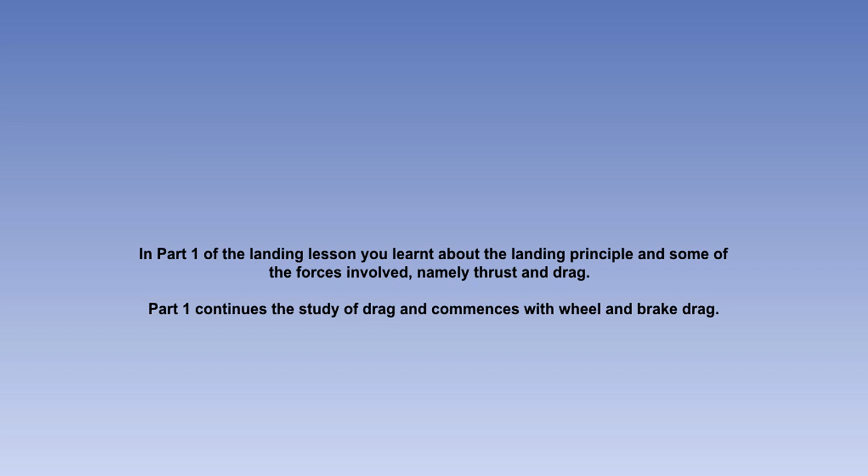Having discussed aerodynamic drag, let's now consider wheel drag and brake drag. Wheel drag is the friction force between the wheel and the runway and with the wheel bearings, whereas brake drag is the friction force between the brake discs and the brake pads.

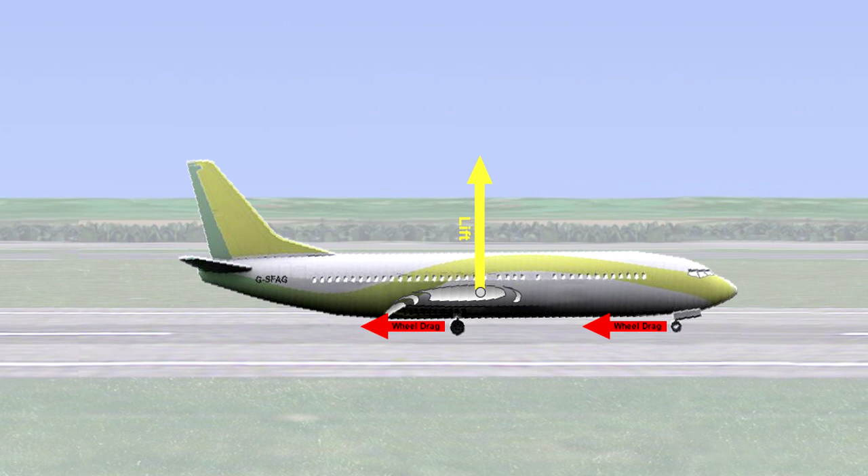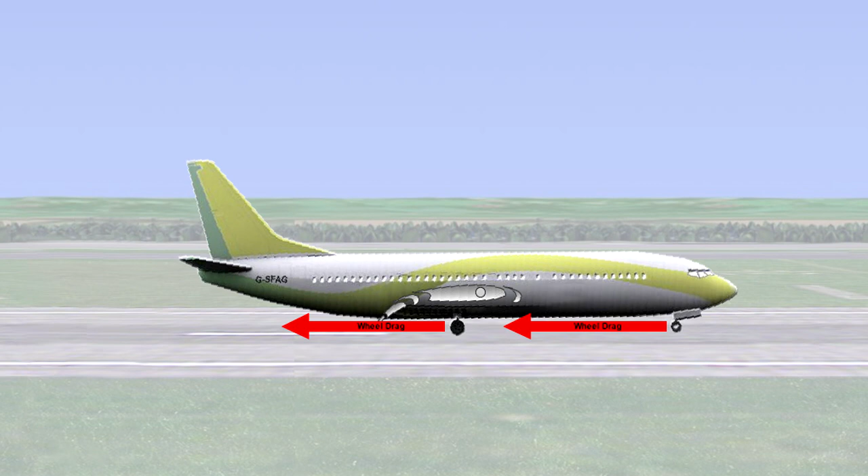Wheel drag will come into play as soon as the aeroplane touches down on the runway. However, as friction is a function of the force pushing two surfaces together, because there is still a lot of lift being generated, wheel load is small during the initial part of the landing run, and therefore wheel drag is also small. As speed reduces and as lift is destroyed by the spoilers, the wheel load increases, which in turn increases the wheel drag. Therefore, wheel drag increases throughout the landing roll and will reach a maximum value just before the aeroplane comes to rest.

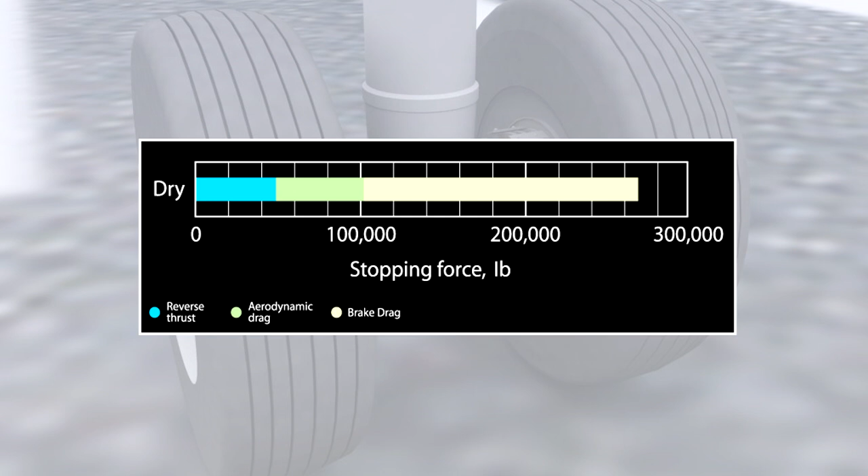This image shows that brake drag is by far the most important and the most effective of the various drag forces during the landing, since it provides the greatest retarding force. However, brake drag is only effective if there is also sufficient wheel drag or wheel friction between the tyres and the runway. If wheel drag is low, brake drag will also be low. Consequently, the brakes are effective only if there is sufficient friction between the tyres and the runway.

Using this example, we see that during the early part of the landing run, when there is not much load on the wheels and therefore not much wheel friction, brake drag is consequently ineffective in slowing down the aeroplane. However, as the lift reduces and more weight is placed on the wheels, brake drag does become more effective in slowing down the aeroplane. Therefore, brake drag increases as the landing roll progresses.

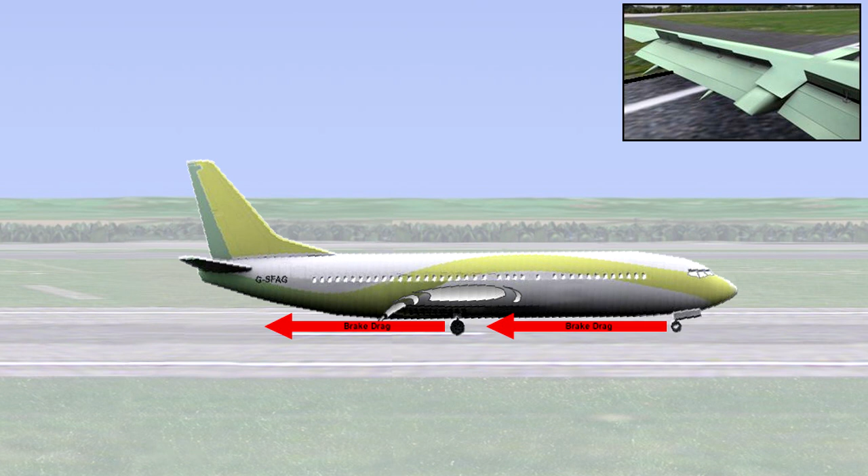This concept is why pilots need to destroy lift as soon as possible after touchdown, so that the braking action can be at its peak effectiveness early on in the landing. This diagram shows how important the spoilers are in improving the brake drag effect.

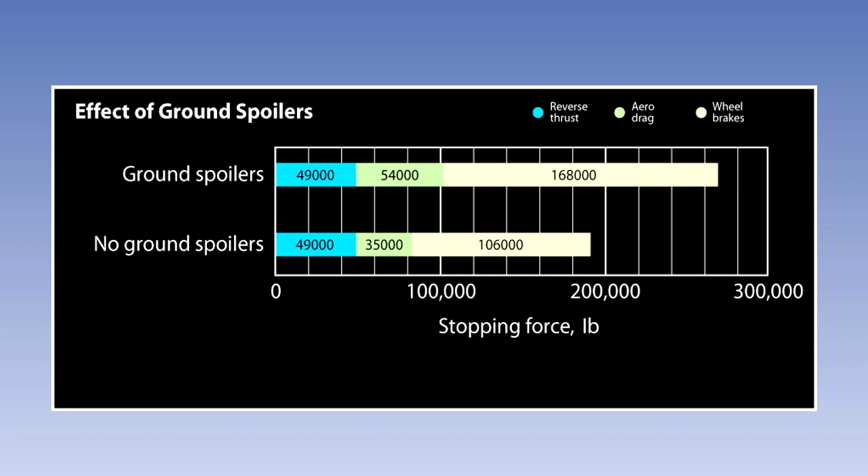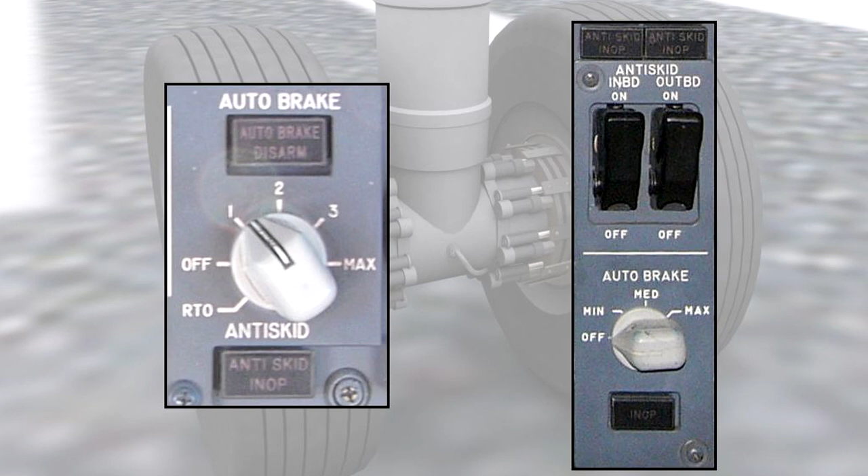This last part on the discussion of the forces will summarise the drag forces on the aeroplane during the landing roll. The first of the drag forces we discussed was aerodynamic drag. As speed decreases during the landing run, aerodynamic drag comprising of parasite and induced drag decreased. Brake drag, on the other hand, increased during the landing roll as more load was placed on the wheels.

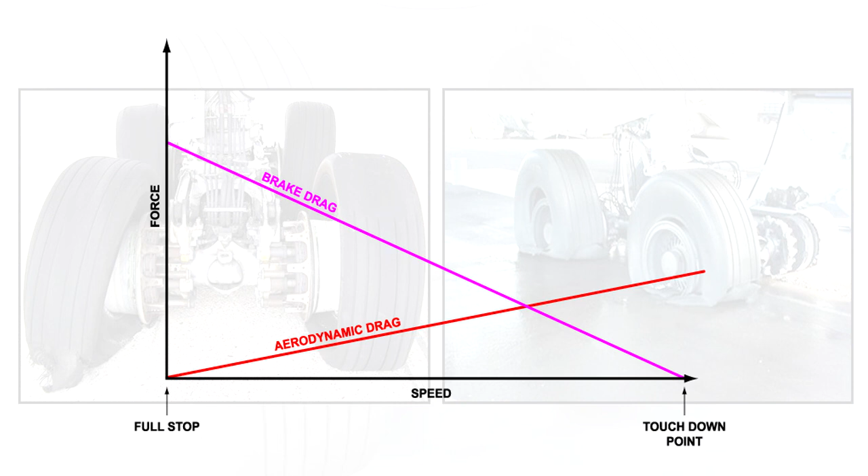Notice that during the early part of the landing roll, aerodynamic drag provides the majority of the drag, whereas once the speed has dropped below 70% of the landing speed, brake drag provides the majority of the drag. The last line on the graph is total drag. From this line, you can see that during the landing roll, total drag increases.

Overall, you can see how important brake drag is. If the brakes were to fail, or the landing surface is very slippery, then the loss of braking would cause the landing performance to massively deteriorate, therefore increasing the landing distance.

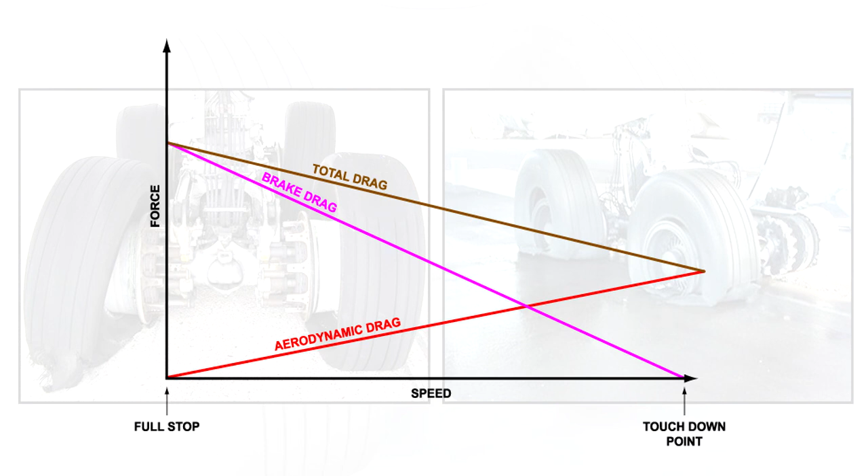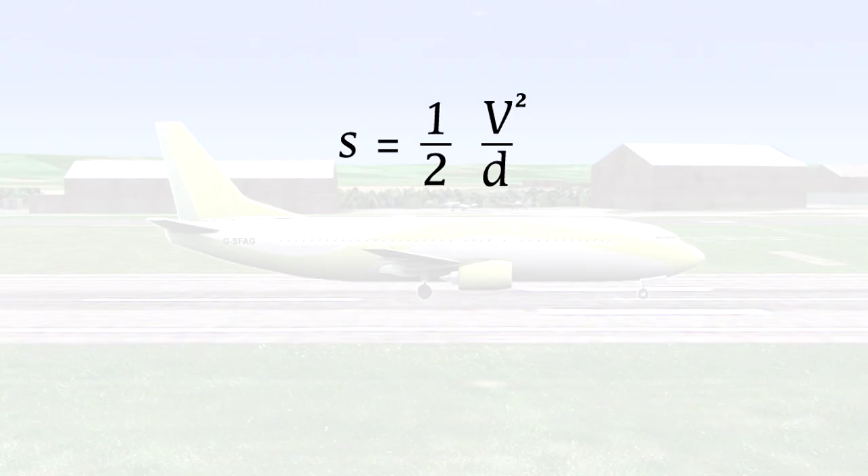Next, we'll examine what determines the landing distance, and also what roles the four forces play. In order to do this, let's briefly detail the formula that is used to calculate the landing distance. The letter S is the displacement or distance required to stop from a specified speed, which is v, with a given deceleration d.

Deceleration is force divided by mass. The force is aerodynamic drag plus the braking coefficient, which is a function of wheel load, minus thrust, or in the case of reverse thrust, plus thrust.

Expanding the formula in this manner allows you to see how a change in one of the variables has a knock-on effect on the landing distance. We'll now analyse in detail all the factors that can affect the landing, with our principal concern being how these factors affect the landing distance.

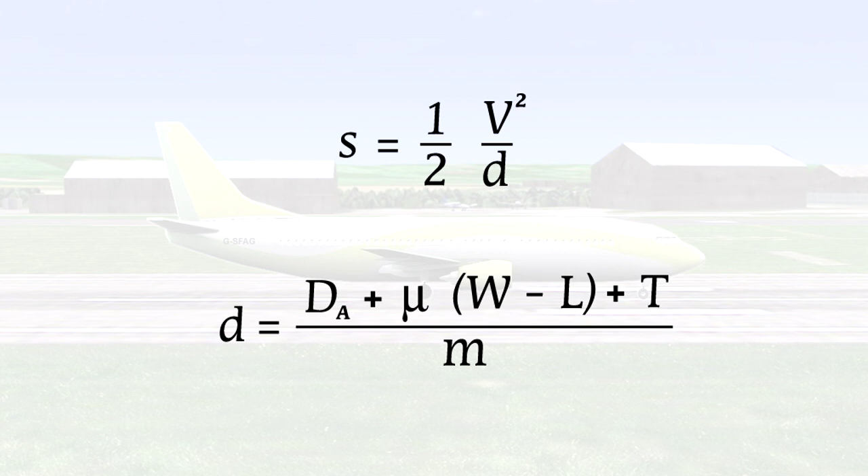The first of the factors that affect the landing is the effect of mass. Increasing mass has three significant effects on the landing, all of which can be observed in the formula for the landing distance. The first is that a greater amount of mass for a given force applied will reduce the deceleration that the aeroplane can achieve. Essentially, the heavier the object, the harder it is to decelerate it.

This is the effect of momentum. More mass will create more momentum. If the deceleration of the aeroplane is reduced, then the landing distance will increase.

The second effect is not as apparent as the others. A heavier aircraft requires more lift in order to fly. To get this extra lift, the aeroplane will need to travel faster through the air. This means that the aeroplane will need to decelerate from a higher landing speed.

Stopping from this higher speed will require a greater distance, and therefore the landing distance will increase. A third effect of mass is that there will be more load on the wheels, and therefore wheel drag will increase. An increase in wheel drag will allow a greater braking force to be applied. This increases the deceleration of the aeroplane. If the deceleration of the aeroplane is increased, then the landing distance will decrease.

In summary, the effect of increasing mass has three effects on the landing performance. Two of them are detrimental, but one is beneficial. The overall effect, as shown on screen, is that increasing the landing mass increases the landing distance. Always ensure that the aeroplane mass is within the performance limitations and never exceed the maximum structural landing mass. Mass calculations are dealt with more comprehensively in the Mass and Balance course as part of the theoretical training.

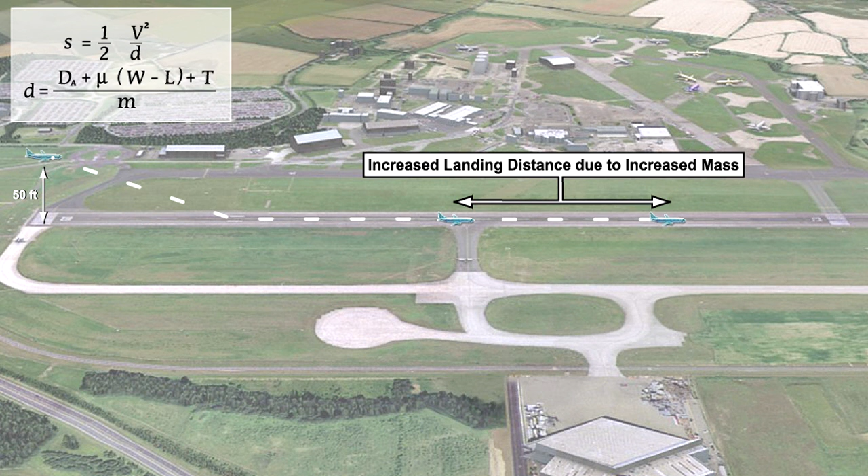The next factor which will affect the landing performance is the air density. This has two effects. The first effect is that a reduced density means that the amount of reverse thrust produced by the engine is reduced. Reduced engine reverse thrust will decrease the deceleration force, and as a result the landing distance will be increased.

The second effect of a low density concerns the landing speed. You will recall that although the landing speed is based upon an indicated airspeed, the true airspeed will be higher in low density. This means that the aeroplane is actually approaching at a faster speed and will therefore require a greater landing distance to stop in.

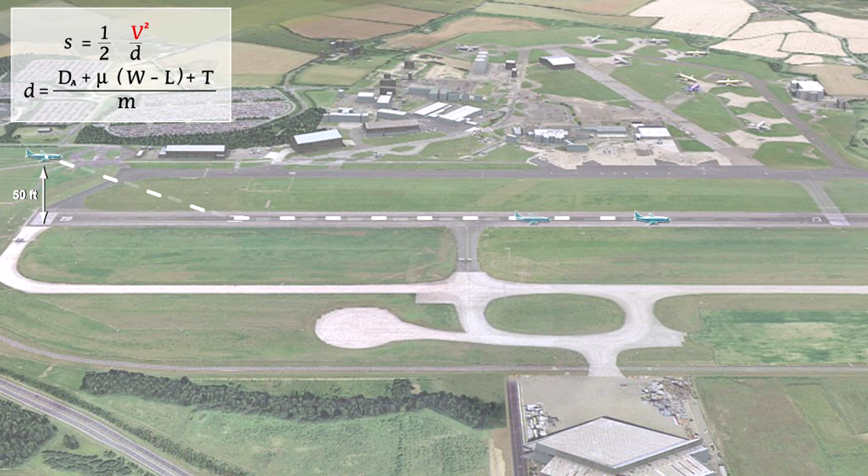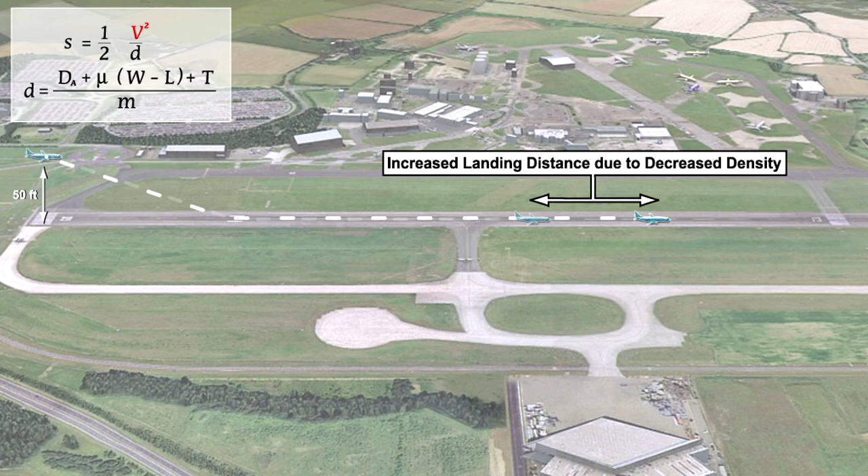Although the full explanation is outside the scope of this course, high temperatures, high altitudes and high humidity will all decrease the density of air and therefore increase the landing distance. A useful statement to memorize is that high, hot or humid conditions all decrease air density and aeroplane performance.